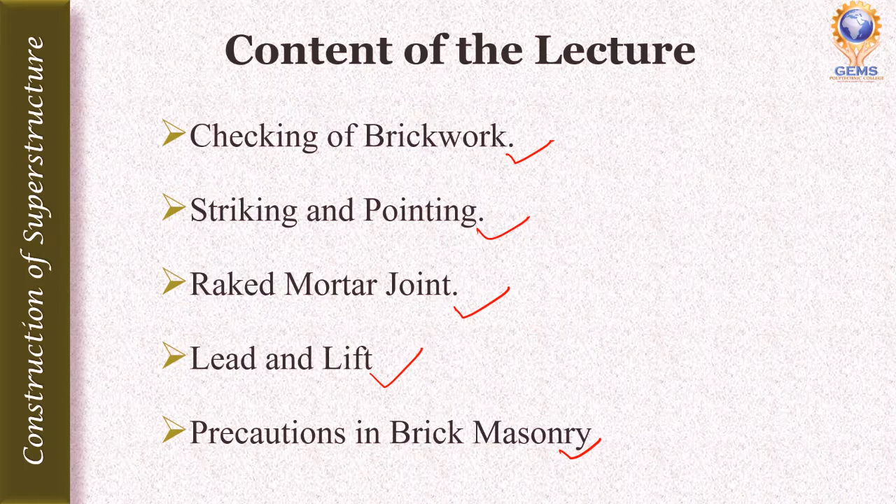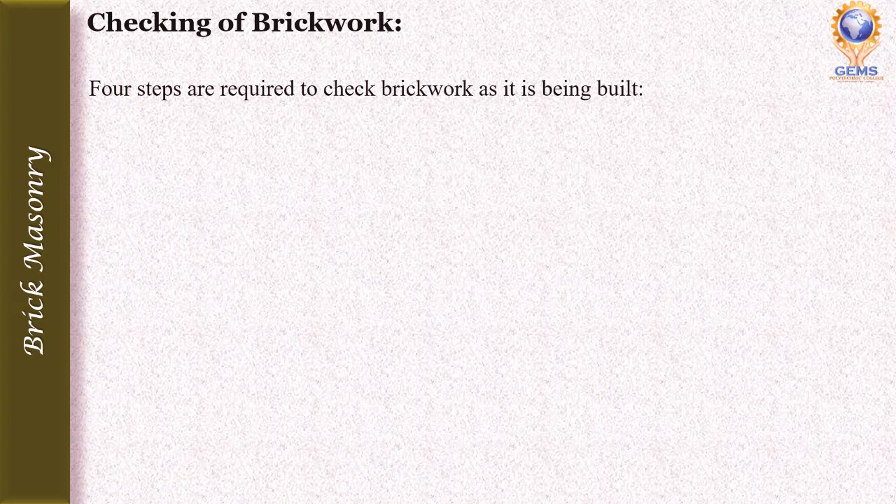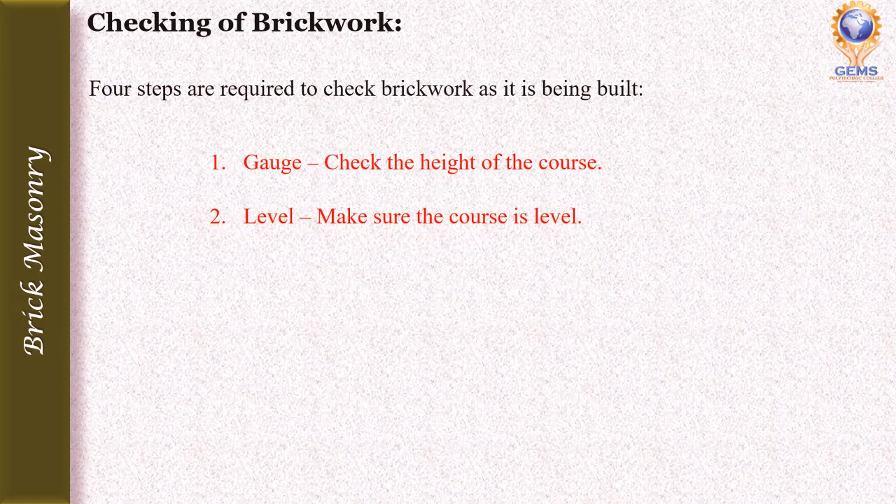Let's start with the checking of brickwork. Four steps are required to check brickwork as it is being built. The first one is gauge, which checks the height of the course. The second is level, which makes sure the course is level. The third is plumb, making sure the wall is vertical. The final one is straight, which makes sure the wall is straight or not.

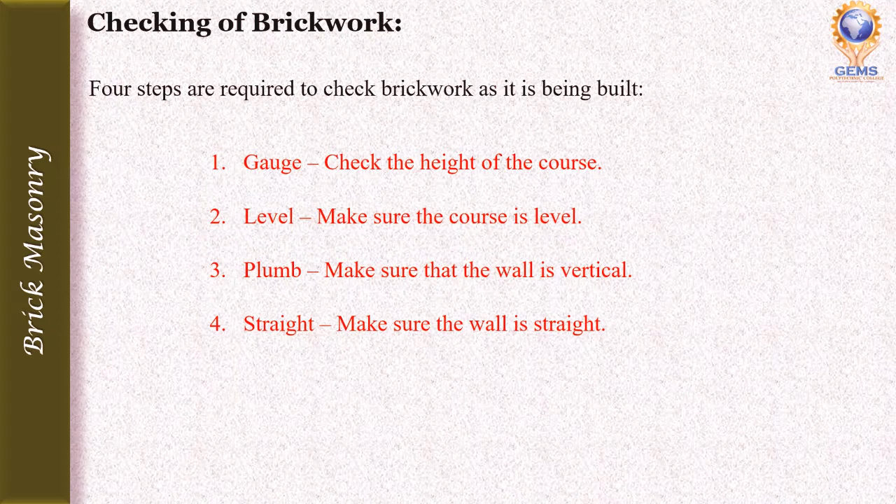These checks should be carried out as each course is laid, in order to ensure that the previous checks are not disturbed while doing these checks on the freshly laid courses.

The first checking of brickwork is gauge. When building any wall, it's necessary to keep the courses at the corner at the same height. This is done by using the gauge board. Mark out a piece of timber with marks corresponding to spacing of one brick height plus the thickness of the bed joint, and use the rod at the corner when each course is begun.

On uneven ground, we have to find the height of the courses by putting a datum peg next to the wall so that the gauge rod can be easily positioned. First we assign the datum line, then put the gauge rod on the datum so that we can easily measure the height of each course.

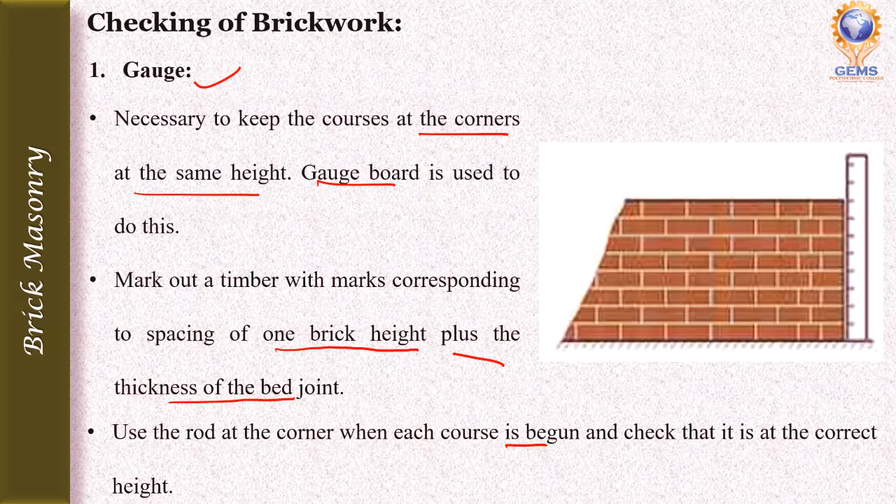The second checking of brickwork is level. This checking is done by using a spirit level to keep the course at level. We have to remember that the corner bricks have been set to the correct height, so any adjustment to the wall should be done by bedding down the bricks in from the corner.

We know bricks are not made to very tight tolerance, so don't waste time trying to get each brick exactly level to one another. The point is to get the parts of the brick which touch the underside of the spirit level, and then we will assume it is in the correct level.

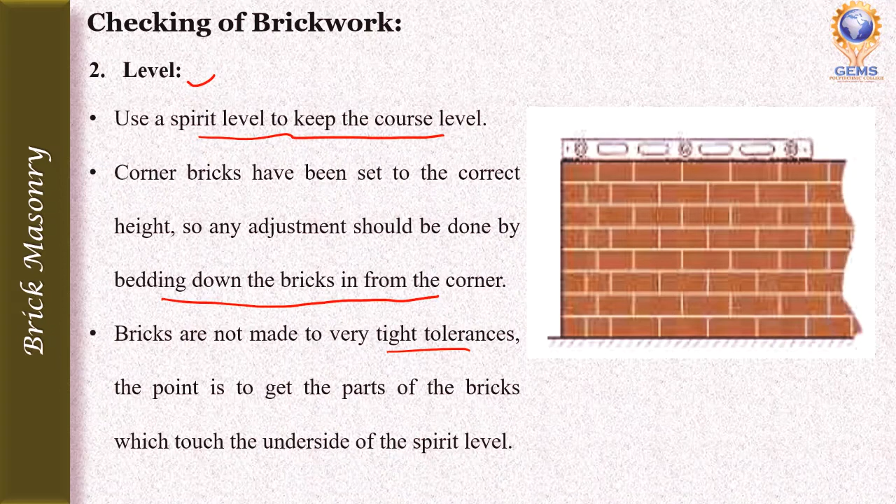The third checking of brickwork is plumb. In this, we check whether the wall face is vertical or not by using the spirit level, checking the verticality of the face of the wall. If necessary, we have to tap the brick across the wall as necessary to adjust the brick as per requirement.

Do not try to do this to both sides of the wall. We have to choose one side as the face and just plumb that side, not both sides. This is the plumb.

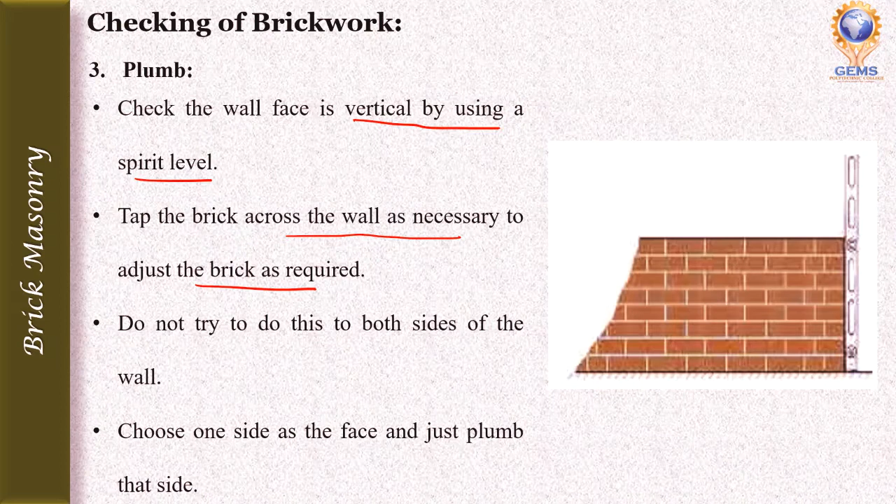The last checking of brickwork is straight. We straighten the course by using a straight edge between the points previously plumbed. This was done where we stop our plumb, and we have to start from that point to do the straight checking.

Check, but don't try to straighten both sides of the wall. Any one side we have to choose and straighten. Here the problem of the shape of the bricks comes into play, because not every brick is of equal shape.

It's unlikely that the straight edge will touch each brick across its whole face, so try to get the center of each brick to touch the straight edge. Not every brick's center should touch it completely, nor should every part of the brick be touched — but at least the center part should touch the straight edge.

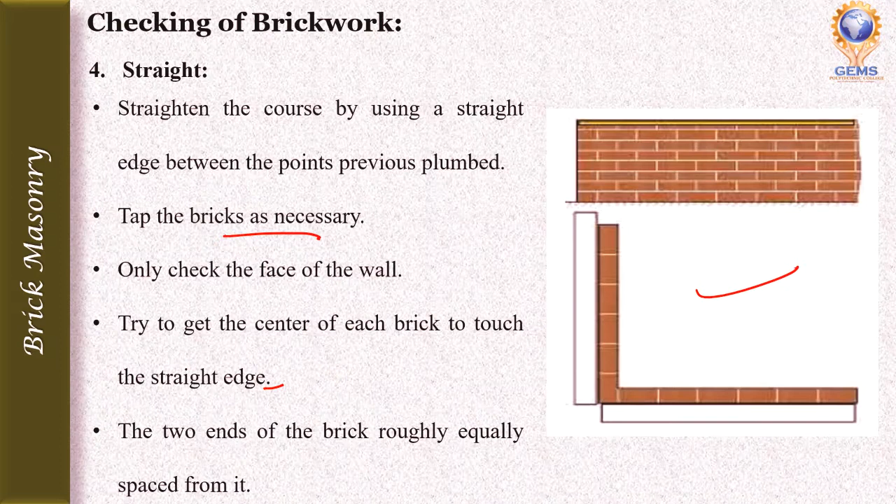Pointing is applying a small amount of mortar into the face joint between bricks. This pointing can be done in new brickwork as well as old brickwork. In new brickwork it is done to increase the weather protection on exposed faces, whether it is facing or backing facing, to increase the weather protection.

In old brickwork, it is used to repair mortar joints eroded by exposure to weather. Sometimes the brick wall is affected by weathering, meaning some mortar will be eroded from it, so we have to repair that. For that, in old brickwork, we are also doing the pointing.

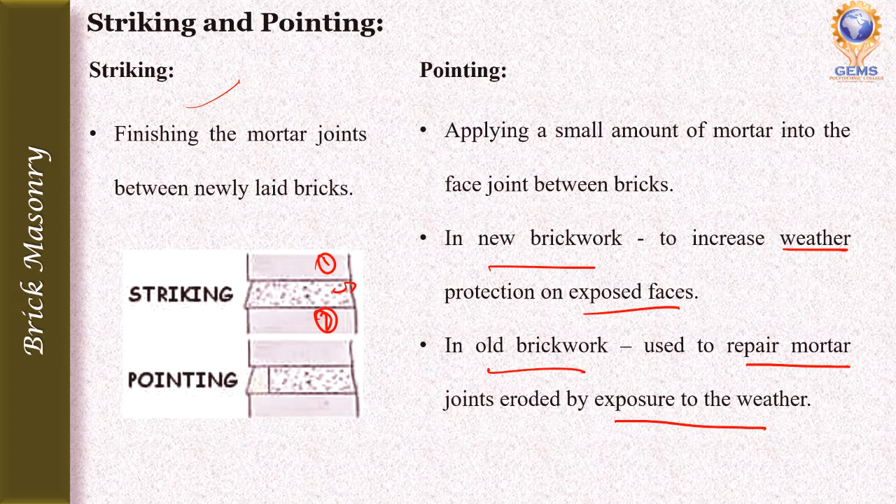What are the different types of pointing that are available? The first one is flush pointing. As seen in the diagram, this is flush pointing. See here, this is a flush pointing.

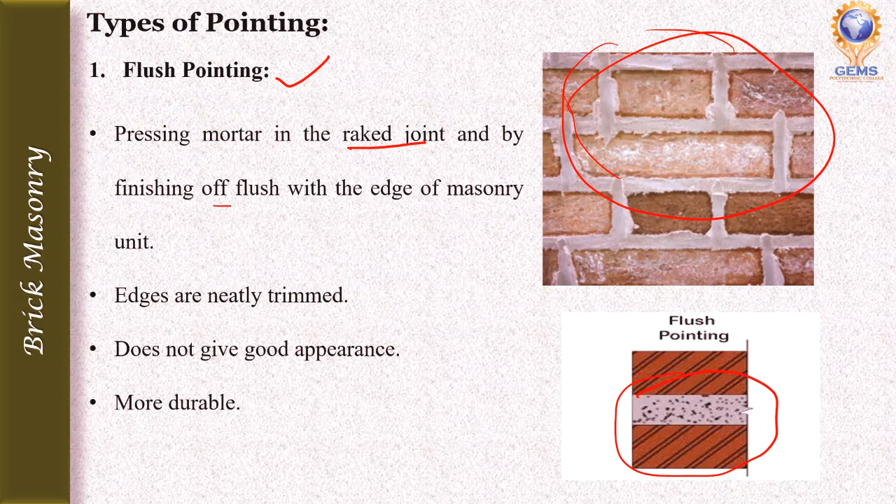What does flush pointing mean? This type of pointing is formed by pressing mortar in the raked joint and finishing off flush with the edge of the masonry unit. So it is mostly like a straight surface with straight edges. This is how flush pointing will look.

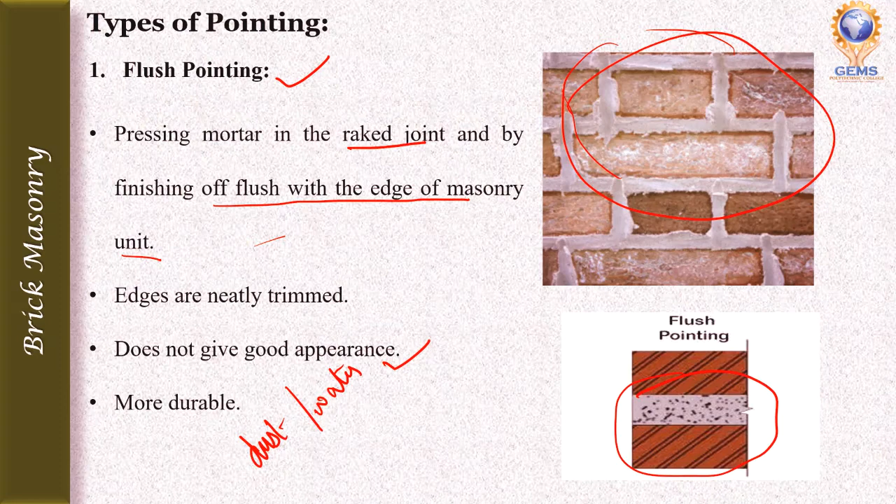The edges are neatly trimmed with a trowel and straight edges, and this type of flush pointing does not give a good appearance. However, this type of pointing is more durable since it does not provide any space for accumulation of dust or water. Due to this reason, flush pointing is extensively used in the field of construction.

The second one is recessed pointing. This is done by pressing the mortar back from the edge by 5 mm or more, so a gap is given of 5 mm or more. This type of pointing we call recessed pointing. The face of the pointing is kept vertical, and this pointing gives a very good appearance.

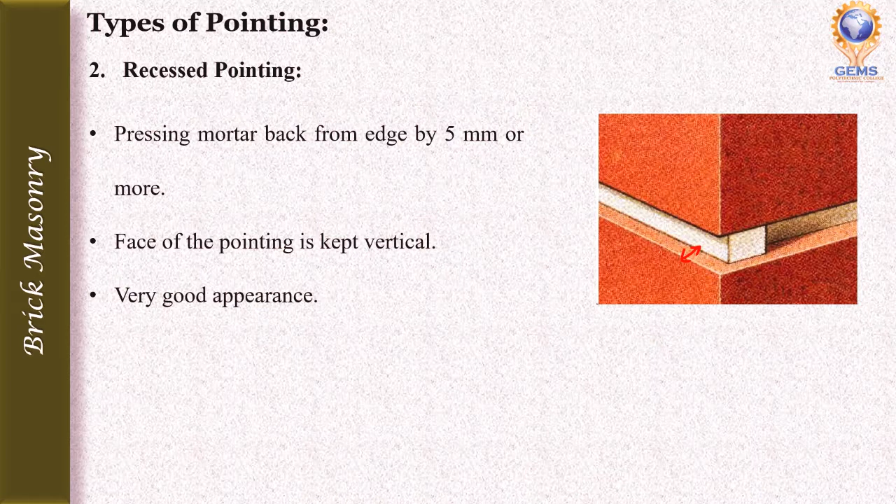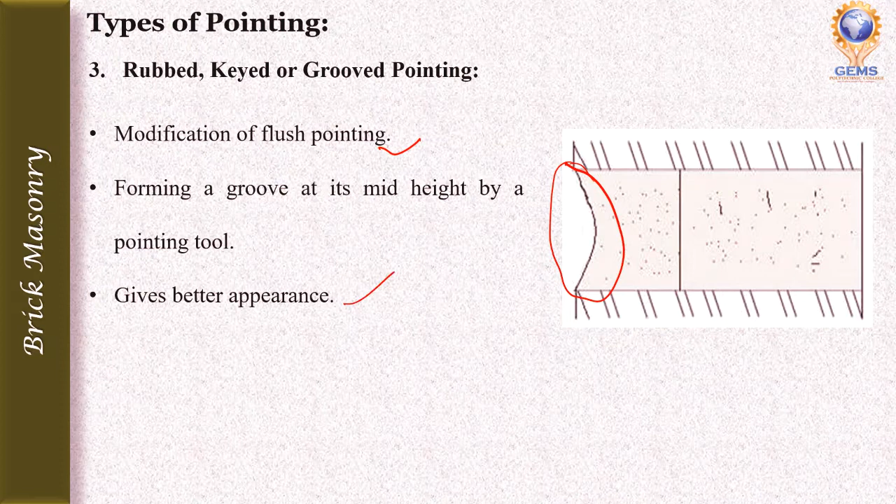The third one is rubbed, keyed or grooved pointing. At the end we will have a groove-like shape. This pointing is a modification of flush pointing, formed by making a groove at its mid height using a pointing tool. This gives a better appearance too. This is the rubbed, keyed or grooved pointing.

The fourth one is beaded pointing. This is a special type of pointing formed by steel or iron with concave edges, as shown in the diagram. It gives a good appearance to the surface, but it is liable to damage easily, since it has a projection that can be easily damaged. That's why nowadays we don't use beaded pointing very much.

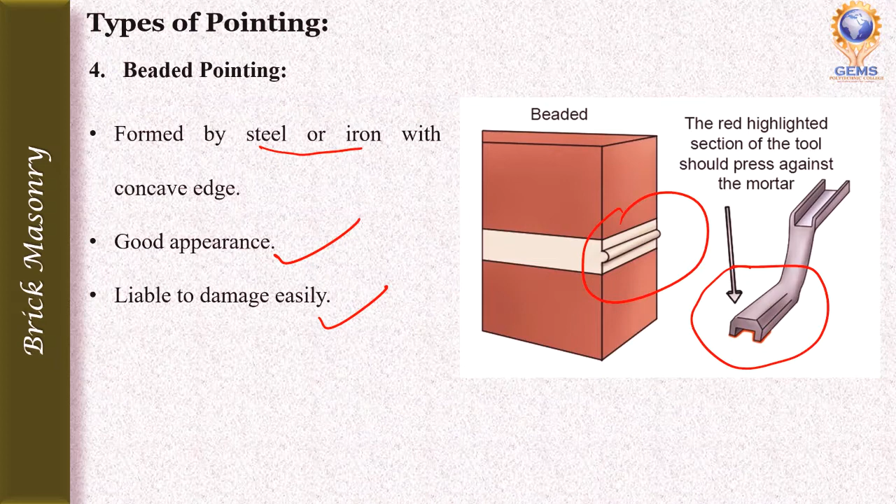The fifth one is struck pointing, which is a modification of flush pointing. In flush pointing the face is flat, but in struck pointing the face of the pointing is kept inclined. The upper edge is inclined and pressed in by 10 mm, so the finish will be in an inclined manner. This pointing drains water very quickly because of the inclined angle.

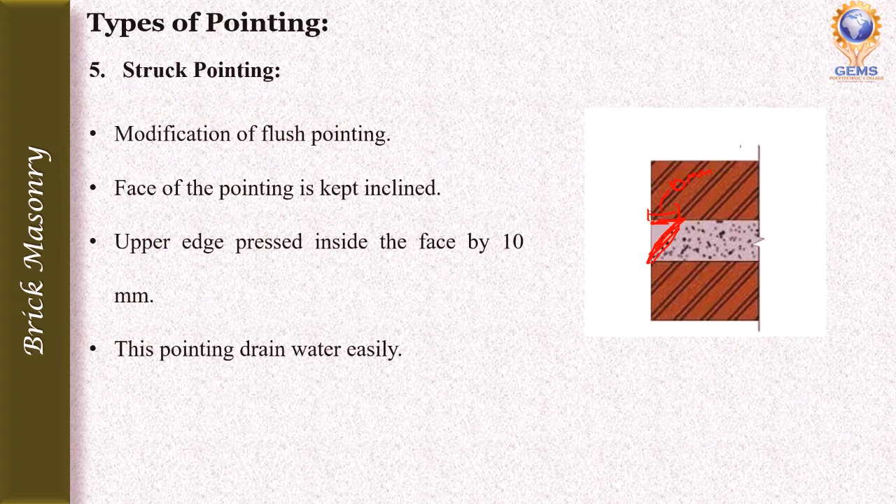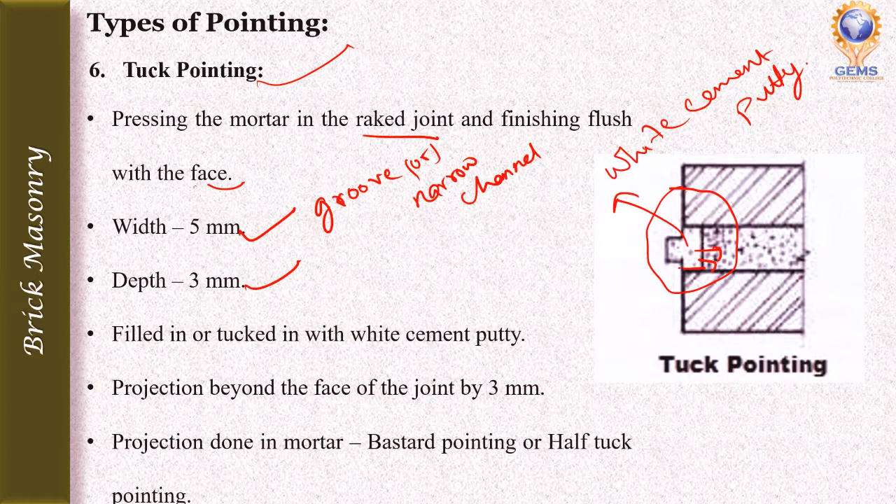When the pressed mortar is green, a groove or narrow channel having 5 mm width and 3 mm depth is cut in the center of the joint. The groove is then filled in with white cement putty, which keeps a projection beyond the face of the joint by 3 mm.

If this projection is made in mortar using white putty, it is called bastard pointing or half tuck pointing. This is the tuck pointing.

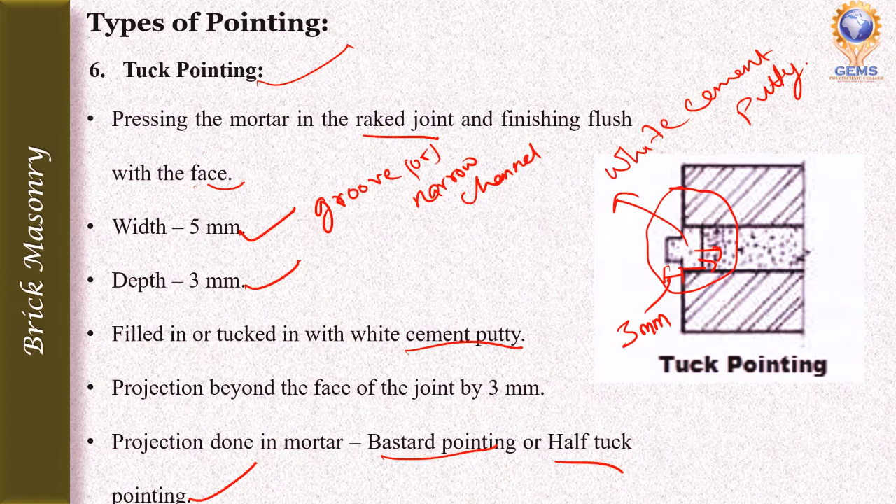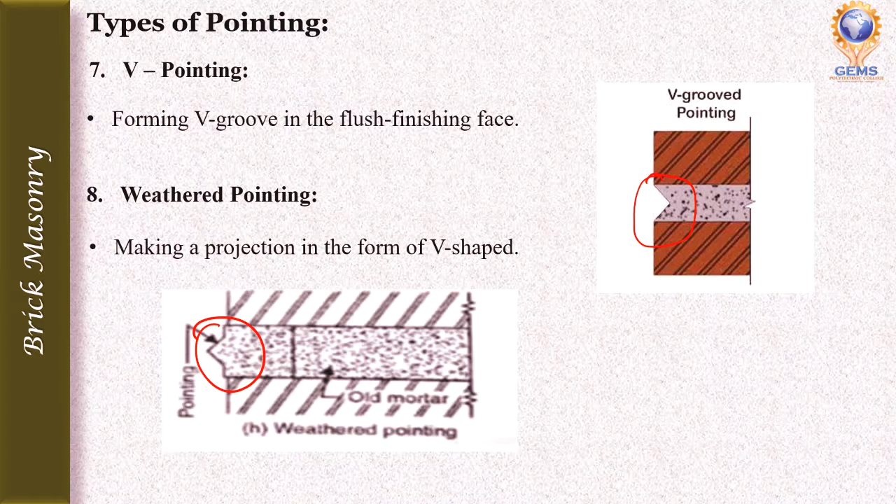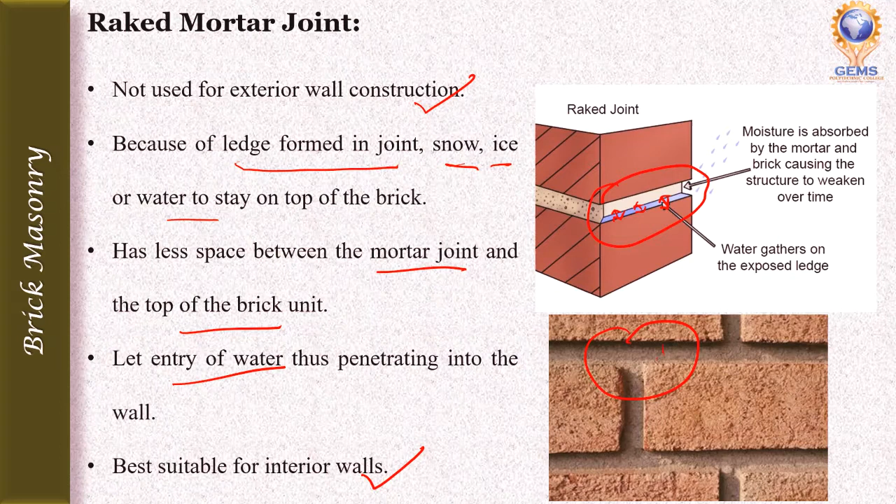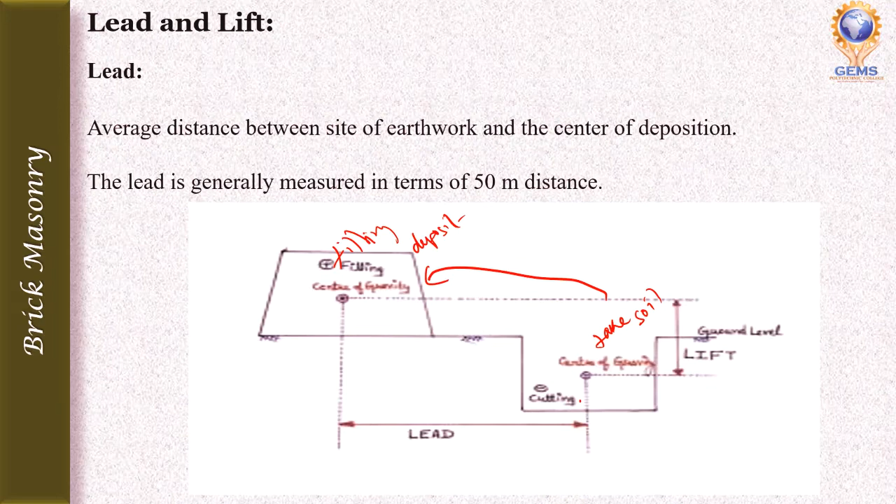The next topic is lead and lift. Lead is the average horizontal distance between the center of excavation and the center of deposition. This is the filling area, and this is the cutting area where we take the soil from and deposit it over here. The lead is generally measured in terms of 50-meter distance.

Lift is the average vertical distance between the level of excavation and the place of spreading or heaping, the center distance from where we are cutting to where we are filling. The unit of lift is 2 meters for the first lift and 1 extra lift for every 1 meter.

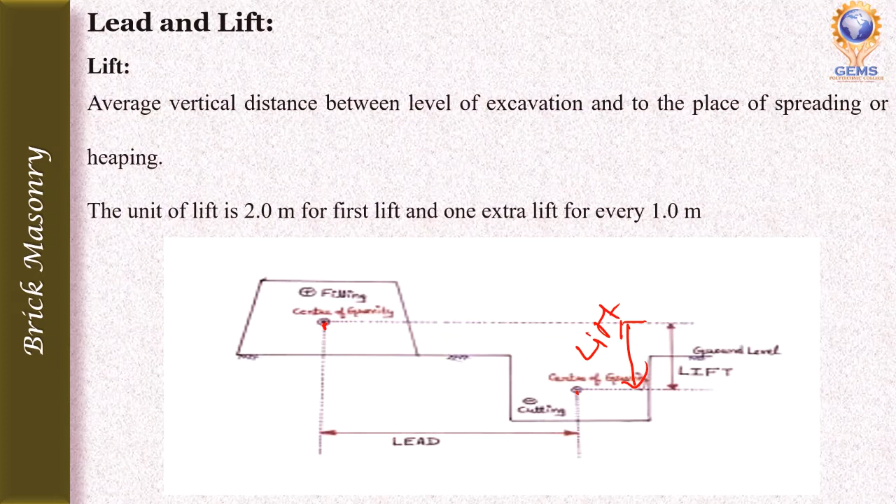Now, what are the precautions we have to consider in brick masonry? Bricks should be as per the specification. Bricks should be soaked in water before using them in masonry work. Use of brick bats should not be too much; only a small number can be used, not large numbers. The frog should be on the top surface.

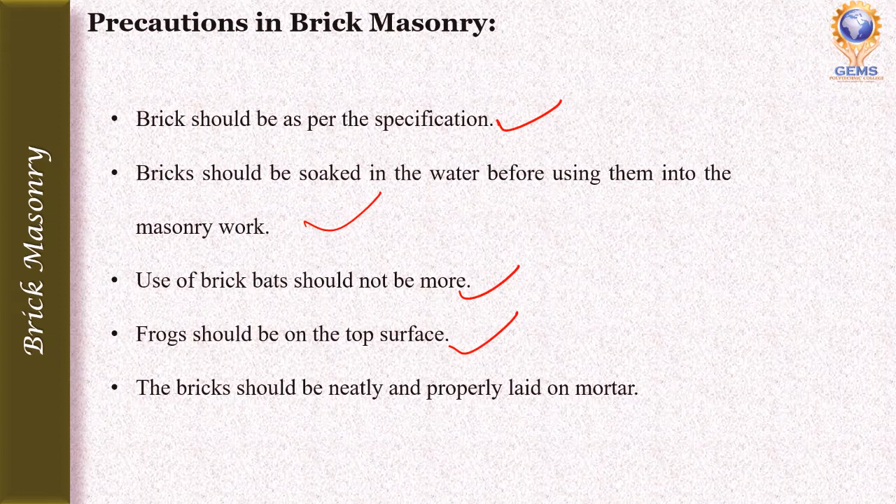Bricks should be neatly and properly laid on mortar, and brick masonry work should be done in proper bonding. Bricks should be perfectly level. The mortar used should be as per the specification and should be fresh. Hold fasts for doors or lintels or windows should be properly inserted into the masonry work. After completion of brickwork, proper curing, at least 7 days, should be done to the masonry for getting required strength. These are the precautions we have to consider in brick masonry.

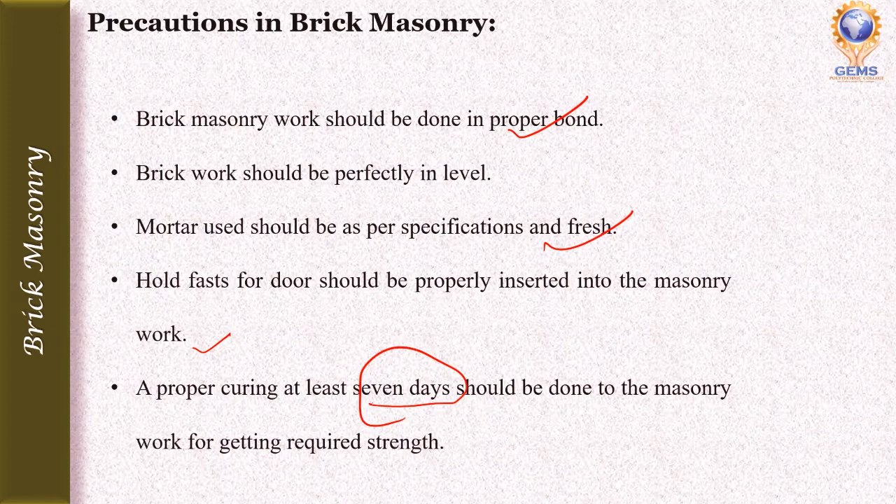So in this video, we first started with checking of brickwork, that is gauge, level, plumb, and straight. After that, we covered striking and pointing and the types of pointing. Then we saw lead and lift, and finally the precautions in brickwork. Thank you.